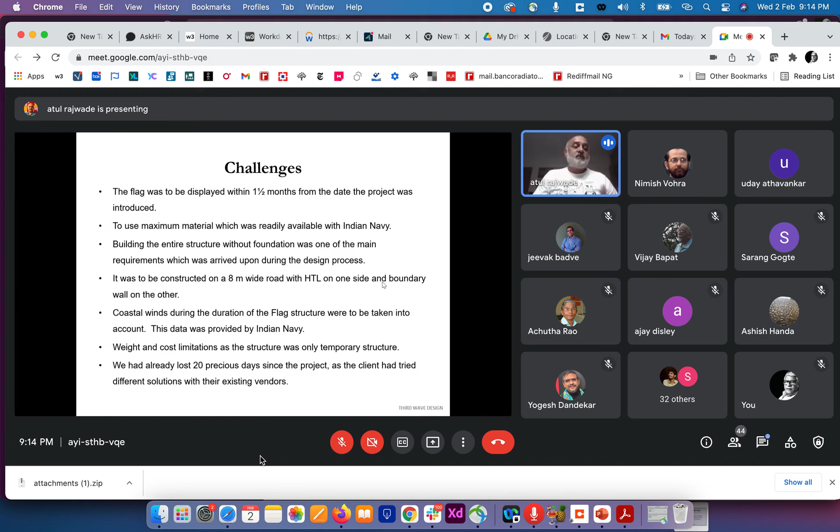Also, the weight and cost limitations of this structure were there, as it was only a temporary structure. And the last challenge was we had lost 20 precious days in designing. So with all these kind of handicaps, we started designing this particular structure. And then we arrived at a solution in a step manner.

Here also the Indian Navy officials helped us quite a lot by boosting our morale that, okay, we will give you a 200-ton crane, 200-ton lifting capacity crane with 65 tons of boom length, 80 meters of boom length. So you can have a lot of weight carrying capacity and everything. So slowly, with small steps, we were able to inch forward. And mind you, all this solution we achieved in less than 20 days. And then there were certain twists, which I will tell you later as we progress.

So the design solution was improvised as per the site conditions, equipment constraints, and the climatic constraints. Why climatic constraints? That also I will tell you, what happened later on. So we started this project on 18th November, and in 3 days we were able to give the first basic analysis, which Indian Navy flatly refused. And this was the first solution we thought of: we try to keep the fabrication as straight as possible. And I said that if I give a little bit of deflection to the system, then probably we can deflect the wind a little bit, and then our force calculations were reduced. But still, this kind of tonnage was quite a lot.

And then we decided that on this 8 meters road, we would extend it 5 meters beyond the boundary line of Indian Navy and break certain walls. That is what I had envisaged. And then I made this triangle with, can you see the cursor? So on this face, we decided to put a 51 meters, 50 meters flag.

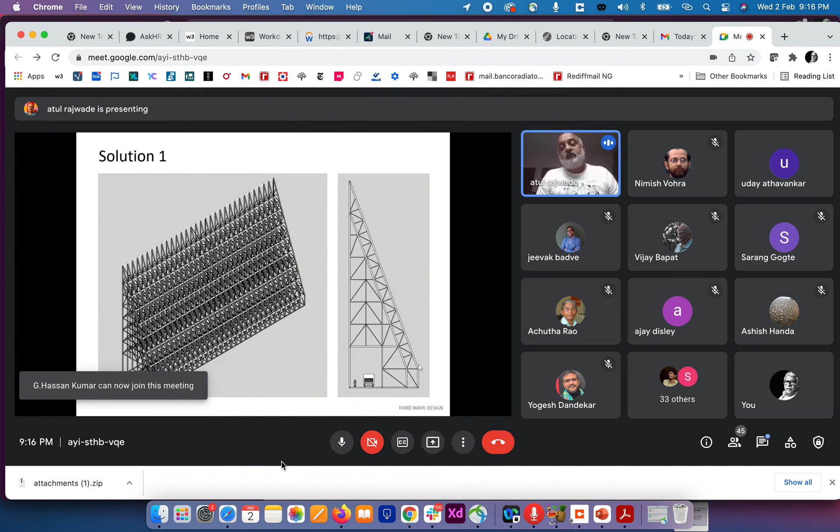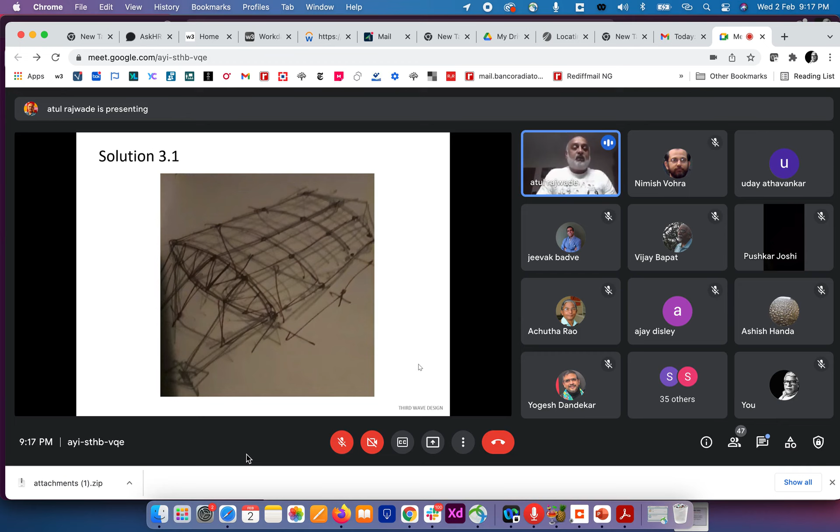And at that time, luckily, the contractor who had decided to plunge into this challenge was also with me. And I asked Mr. Kulkarni, can you and will you be able to give tensioning? Because generally I've done tension structures, but I've never done a tension structure spanning such a big length. So he gave me sufficient confidence: wherever you say, I will be able to give tension. You just don't worry. You just go ahead and design. So finally, with this kind of confidence from the contractor, I came up with this solution.

So in this solution, there were these 4 units placed at 23 meters center to center, and there was one top tray and one bottom tray. These trays had a very specific function: the flag will be unrolled with the help of the big crane, which will keep this flag at 25 meters height, and then there will be these sea cadets placed at 3 meters center to center. 22 cadets will slowly lower the flag. So this was our fallacy, or this is what we had imagined how the whole thing would happen.

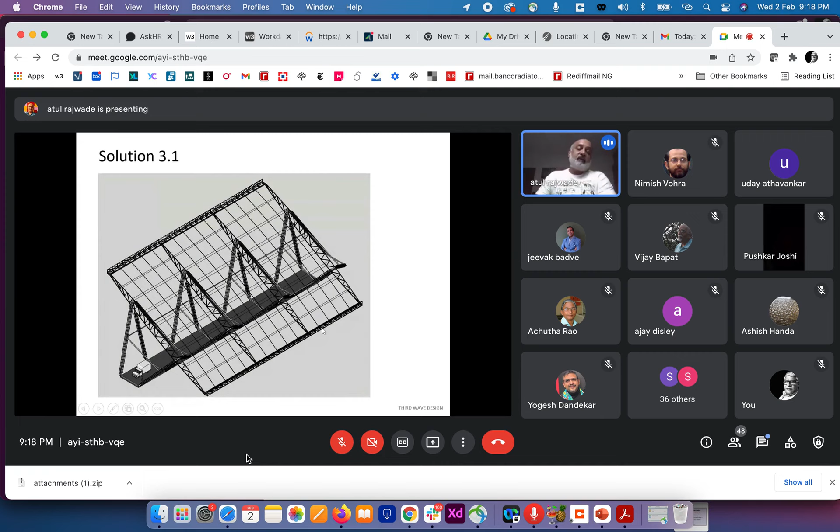And similarly, there is another tray below, just above the flood line, where another 20 cadets will stand and secure the flag below. So this is how we had envisaged the whole thing. So this is the 8 meters road. From the 8 meters road, we flared up the structure. This was a boat-shaped truss, made from the structural material given by Indian Navy. If I had to design it, I would have gone for a square hollow section, but we went for a back-to-back angle section, which was available. So we flared the structure, we supported it at one-third distances, and this is how we were able to do it.

And then I also convinced the Indian Navy people: don't tell me to put this flag at 51 meters straight, rather we can put it at an angle of 30 degrees. This will reduce the weight and the force of the wind, and it was also visible from Gateway of India.

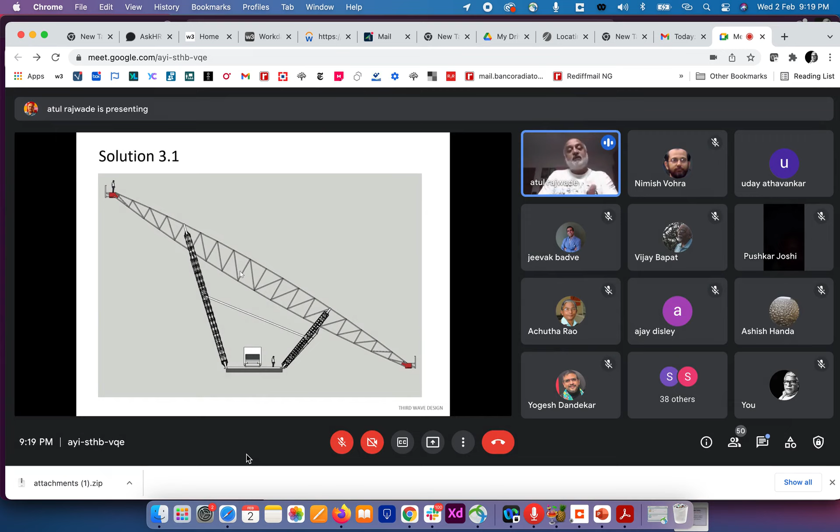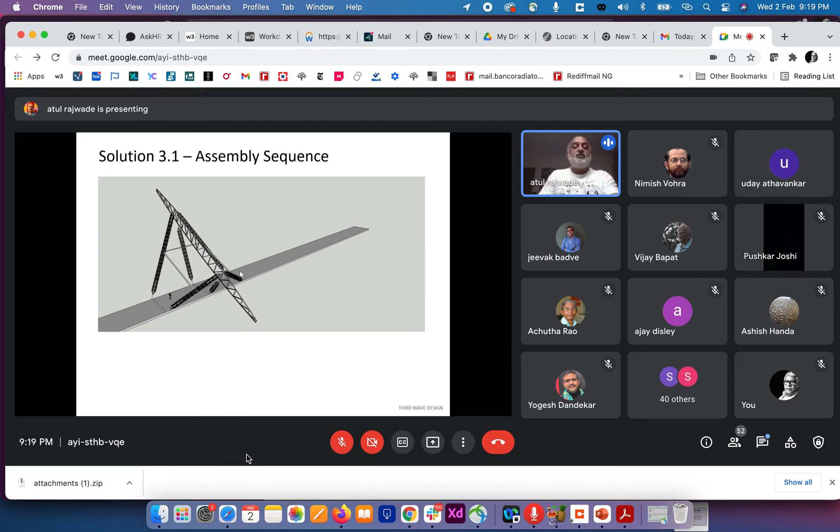So we actually carried out all the visual simulation tests. Anyway, I will just go through the assembly sequence we had envisaged earlier. So this is how the supports will be assembled. Then this one unit was secured. Then the second unit will be secured. The top truss will be put in place.

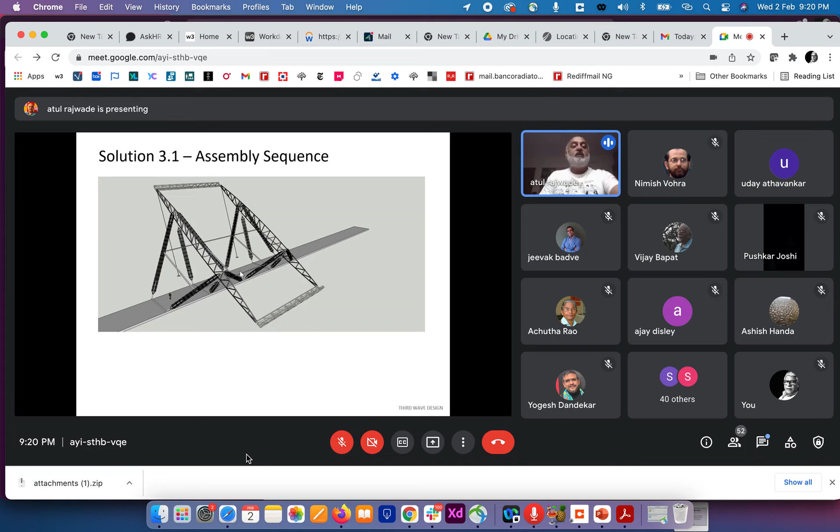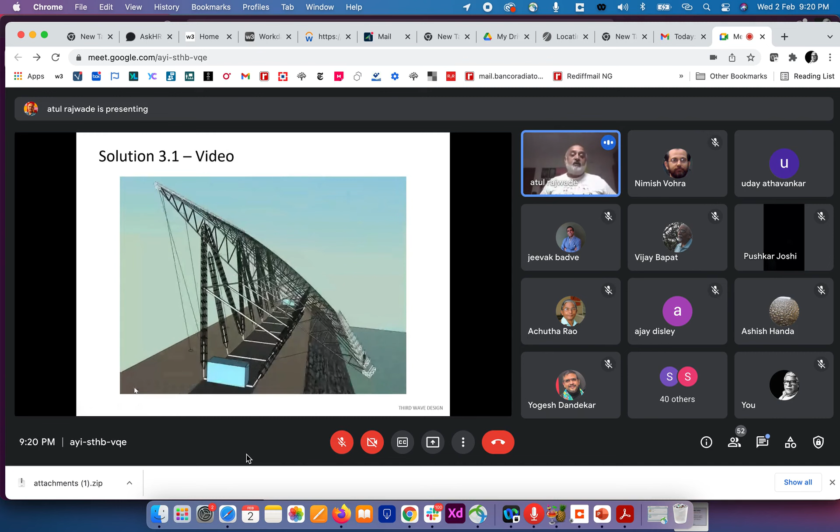The tray will be put in place. Then it will be secured with cable ropes behind to balance out the weight. And this is how the whole assembly sequence will actually happen. So this is what we have thought, and this is a small video of the structural system we had envisaged. And why I'm saying that we had envisaged, there is a twist to the whole thing.

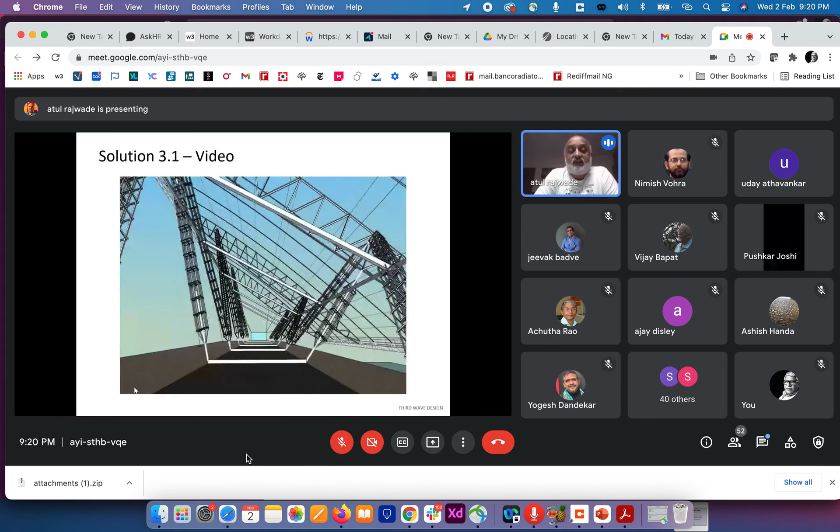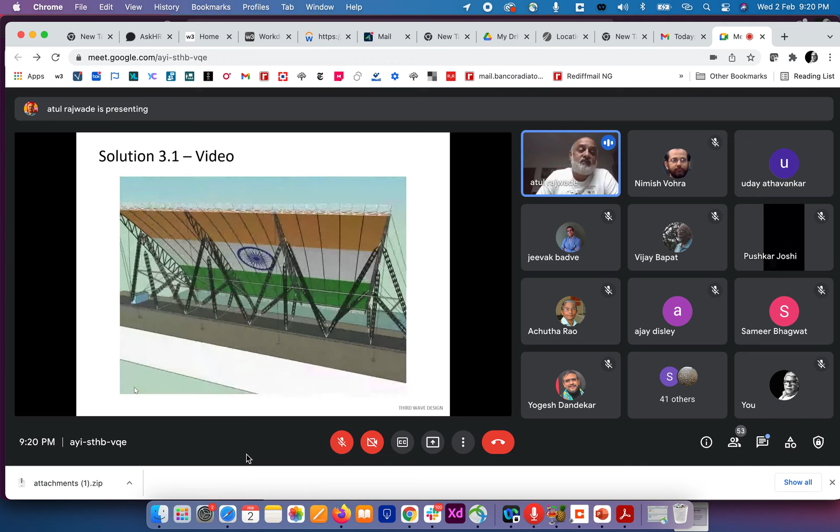When we started working on this activity, mind you, this is just an 8 meters wide strip. We are used to working in workshops where we make these pre-engineered building sections, and here, in order to save time, we said that we move the workshop to the site itself, and it was hardly a small strip. So this was the solution.

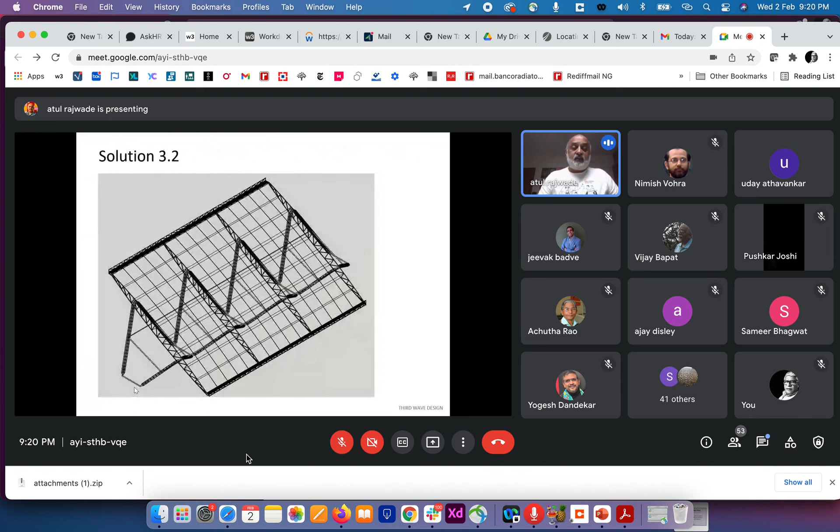But then what happened was, somewhere down the line, looking at the speed of construction and everything, and this happened on 20th November, by the way, we realized that the contractor was going at a little slow pace and it would have been difficult. It was possible, but it would have been a very tense situation.

So we decided to go for this really daring solution where we would support the whole structure only on 2 supports, which was spanned with the help of cables. We decided to make a cable-led structure, and we spanned the whole truss, the whole flag, only on these 2 supports at the ends, supported by 18 mm cables. Again, Indian Navy was kind enough to give these cables.

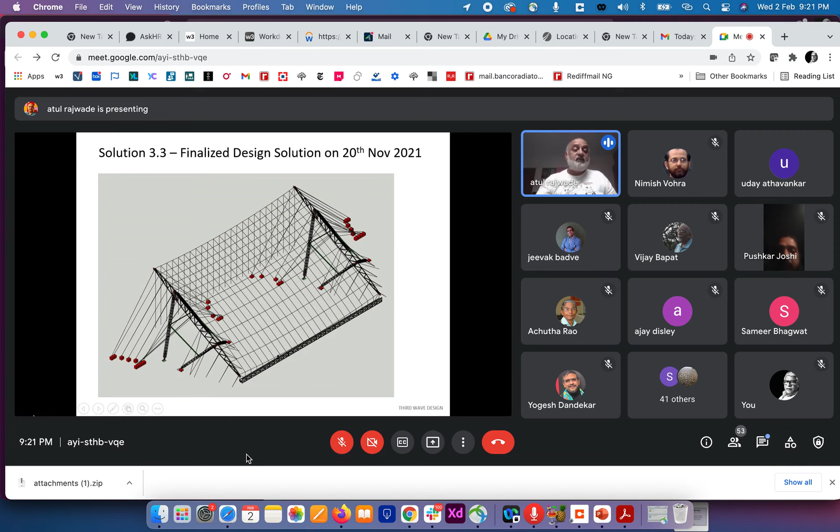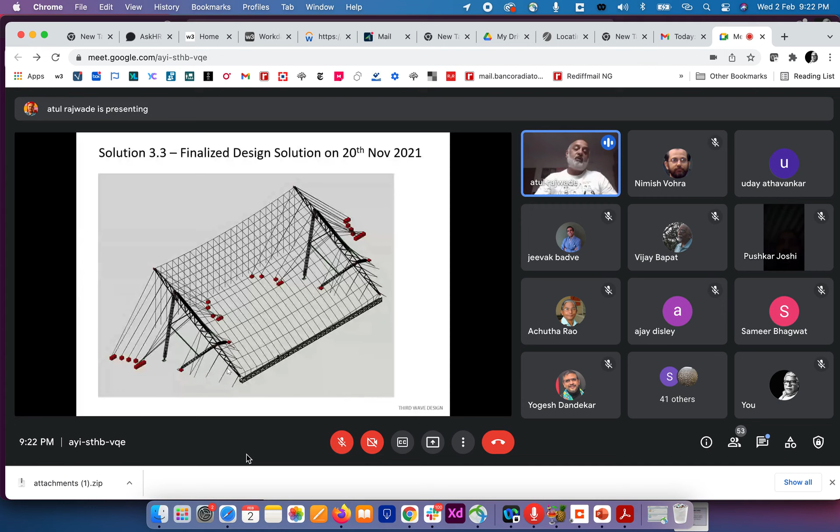Now the whole point was that these cables were tied down with the help of counterweights, and you can see these counterweights here. These were all 3.5 ton to 5 ton counterweights, with which the whole structural system was stabilized. And on the reverse, on the sea side, we put all the rock anchors on the wave breakers which were there. So this is how the final scheme was decided.

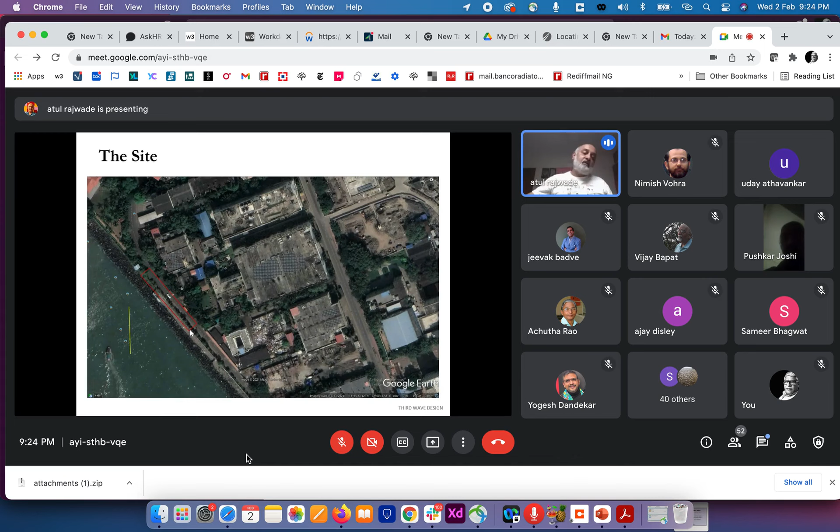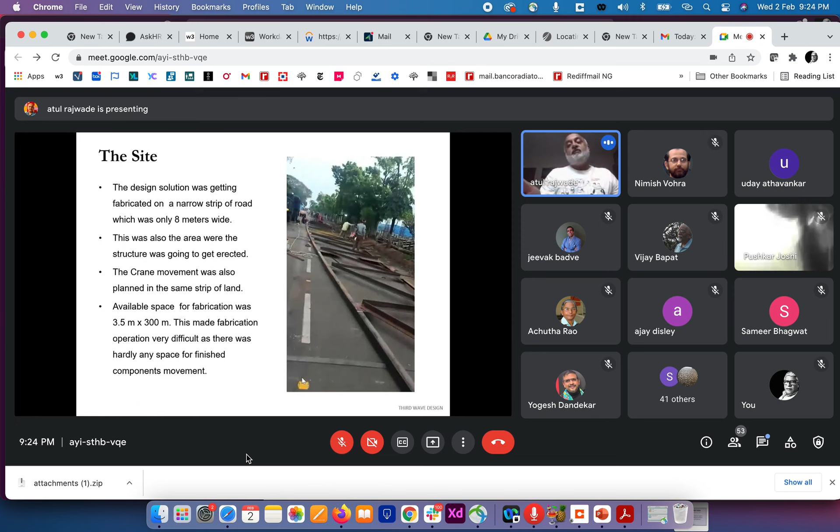Now the site, as I told you, was just an 8 meters narrow strip, and I will just show you a small clipping of what kind of problems we faced. The available strip for working was only 3.5 meters by 300 meters, and this was really tough for the contractors to actually work on such a small restricted site with 3.5 meters clear for the crane movement.

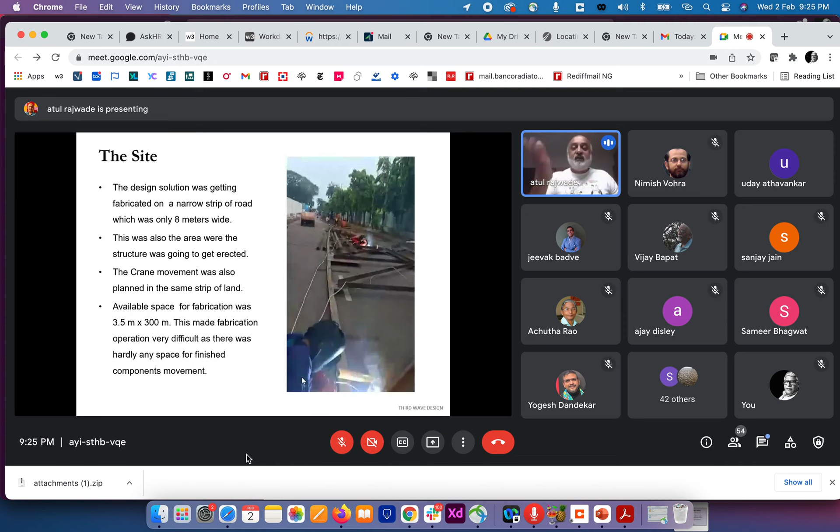And you see, this is a 50 meters truss. When we do all these things on computer, okay, we know it is 50 meters, but when we actually start seeing it at such a scale, it's really scary. So this is how, using the same material we had, we developed this thing. We put 50 workers, and we were really pushing them to the limits. So this is just one truss getting over.

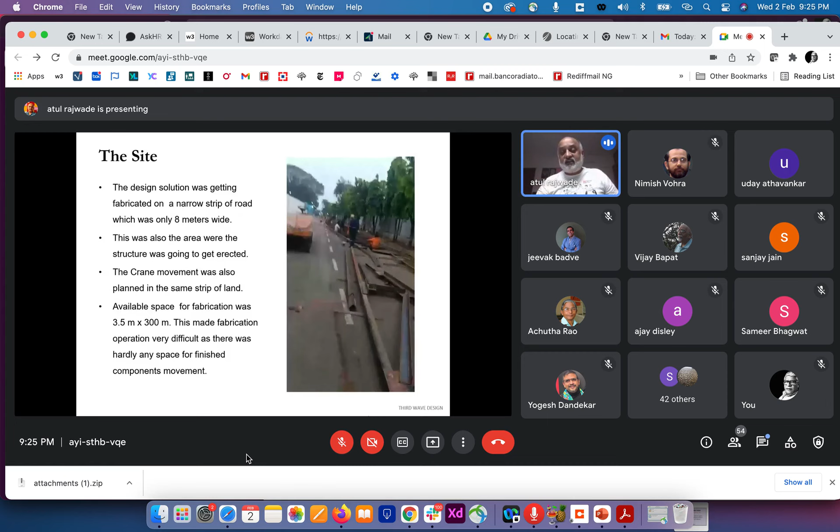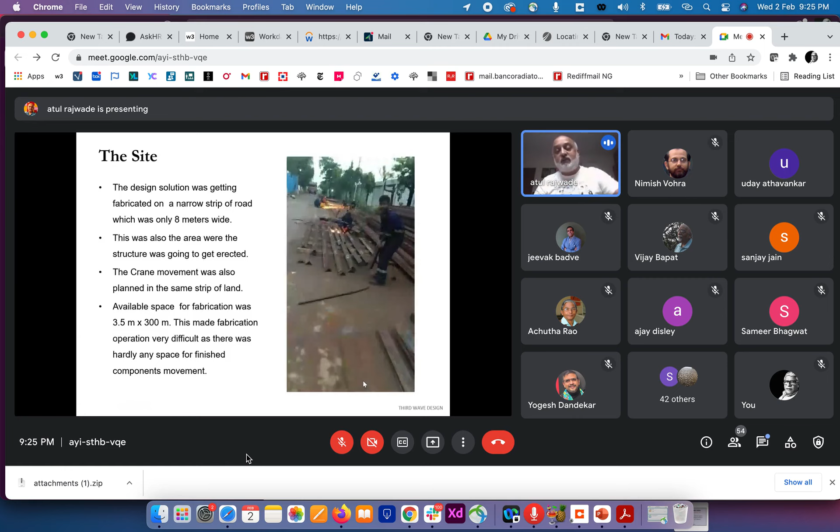The second truss, then I will just forward the video a little bit ahead. Once this is done, these 2 trusses were getting manufactured. Then there was this cutting line where people were preparing all the material. This was the cutting shop which we had put. So all the plates were getting manufactured in this area, plates and everything. So this is how our workshop was.

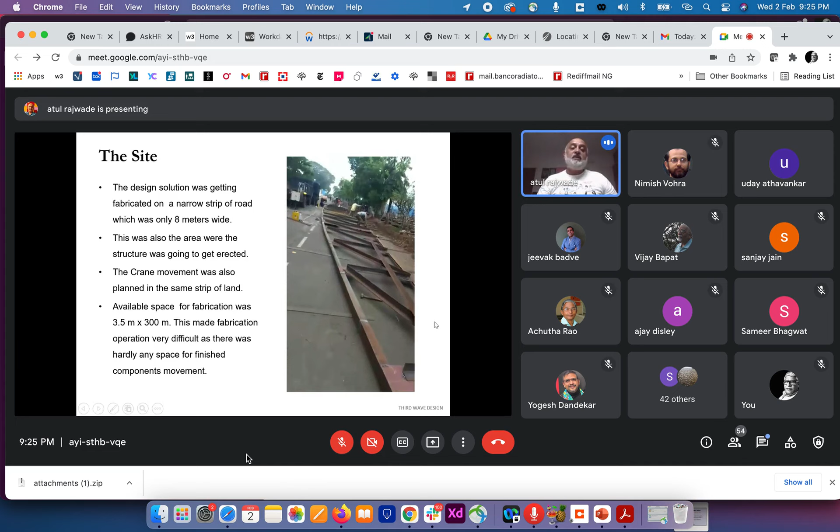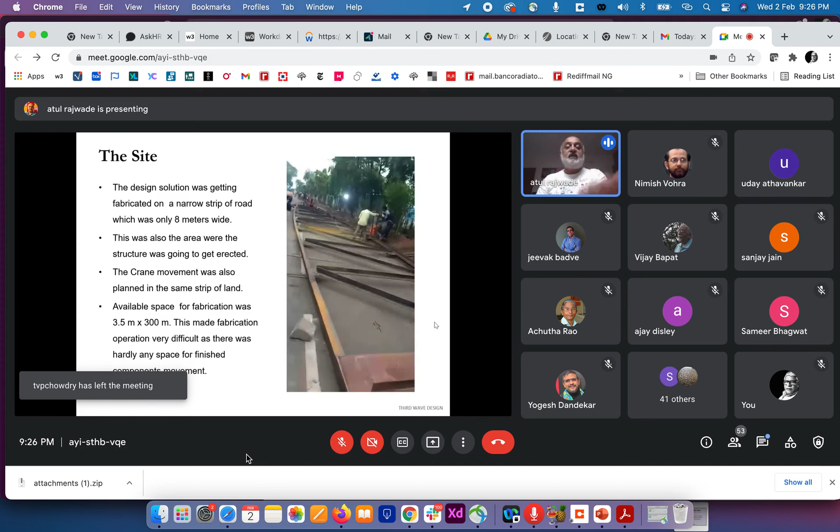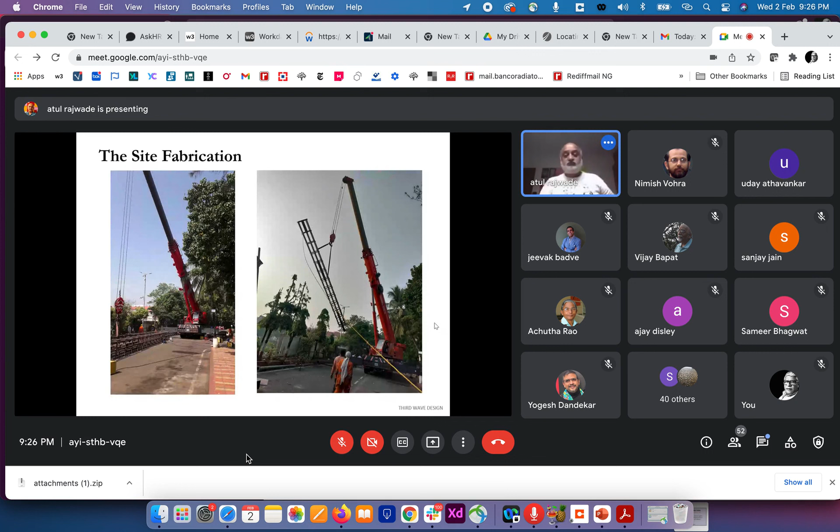Normally, our workshops are places where there is an EOT, electric overhead traveling crane. But here we had no luxury of putting an EOT. We had to do all this lifting with just cranes around. So we started with our conventional puja on site, and then this is how you see the work in progress. These are the photographs of work in progress, and then these big mammoths came into picture. So this is that 200 tons crane which simply lifts it, and it's how the members were prepared, and they were put in place.

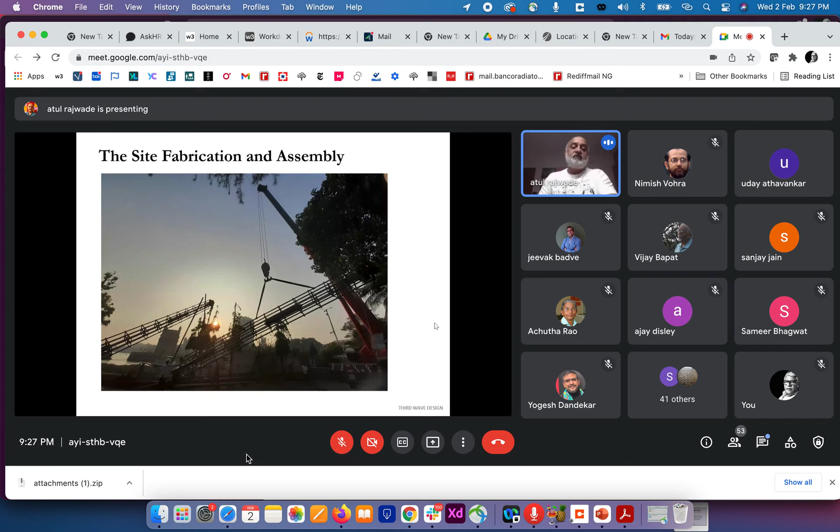The work was going on 24 hours. Many a times we actually slept at 3 o'clock in the morning. We used to go to the hotel behind the Taj and then again come back at 9 o'clock. So this was the kind of work which was happening continuously, and there were many challenges. The metallurgy of the material which they had provided was not actually the one which we had thought about. There was a certain amount of brittleness in the steel, so we had to do some design changes. This is how the whole thing was put in place.

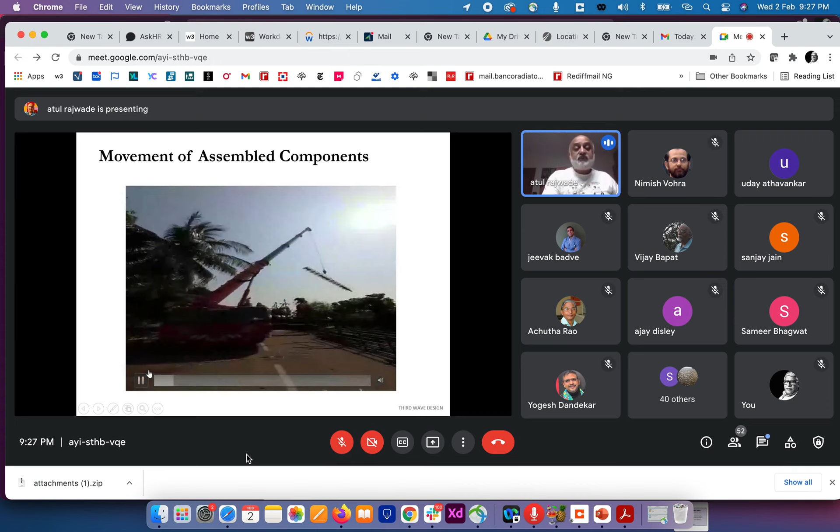Then I will just show how, if you see this crane, it was occupying more than half the area of the road, and it had to have all these things cleared out. So it used to eat into our fabrication area also. And then this is how the members were lifted and put in place. I'm just going a little fast because we have got very less time. This is how the cranes were put in place. There was another crane which was holding.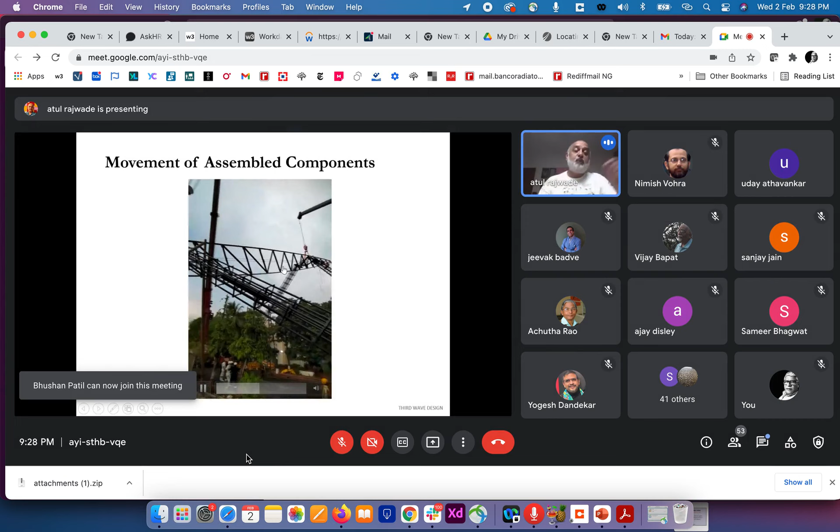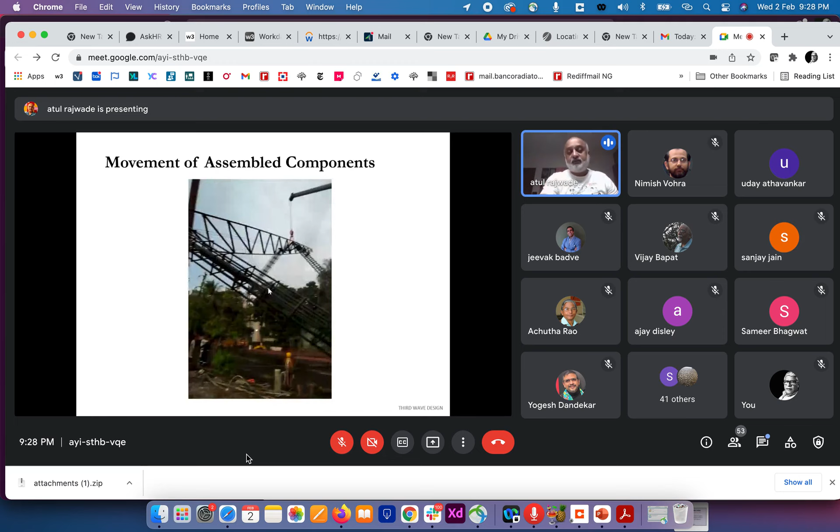Then you see the small dots. These are the people, our fabricators, brave people. They used to climb all these things. They used to bolt it with 10 mm 30 dia bolts. See this particular member. It was hanging freely before it was secured to rock anchors behind. And then because of the speed, you see the crane and how the trusses were put in place. This is how the two cranes lifted this 50 meters truss, and it was like an orchestrated move, a dance of these two booms, which slowly placed this 50 meters truss in position.

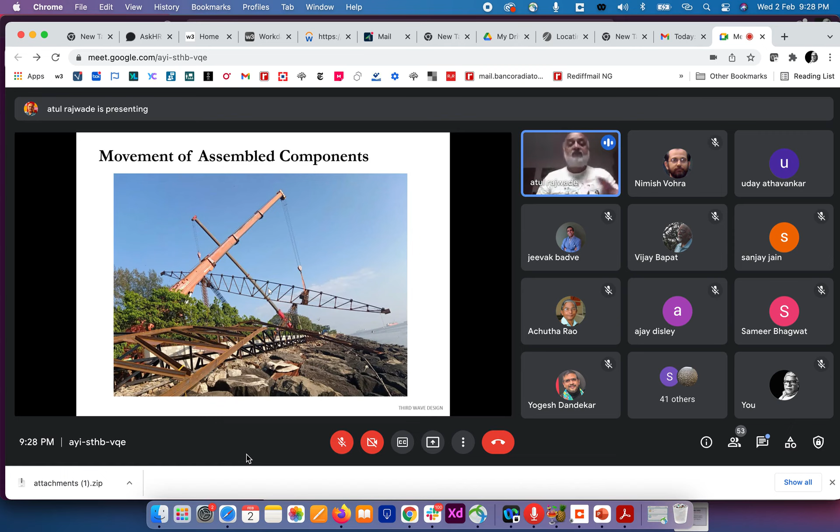Right now in the picture you can see that this looks like a very stable system, but I will just show you another video where you will see how this truss, when we tried to lift it, was moving like a snake, and it was scary. It was in our modeling; we knew that this is going to deflect 1.5 meters, but when we actually started lifting this thing, we realized, oh my god, are our calculations right? The view made us doubt ourselves. I will just show you, and it was really scary.

So lifting a 50 meters truss, which was absolutely coming to life. There I had to put a brave face. Oh, I do it every day. But this was not the case. This is the first time I'm seeing a 50 meters planar truss moving. Even the naval officers, every one of us was really tense at that time.

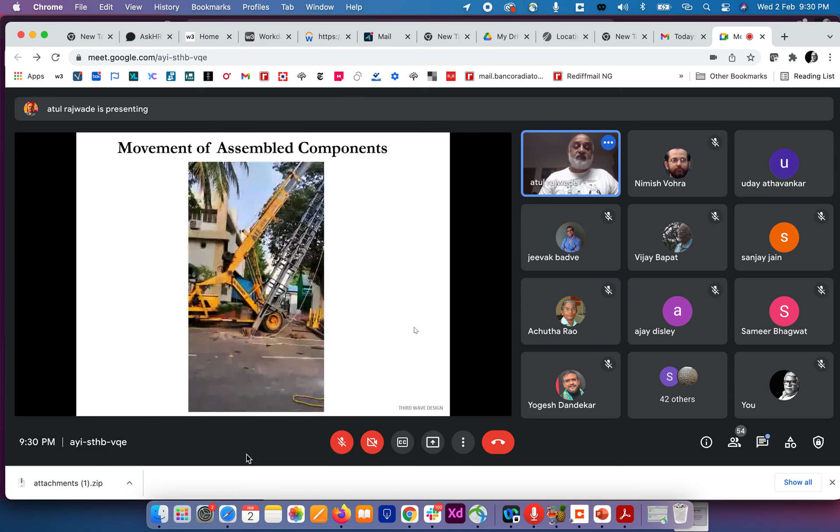Anyway, so again, how people went climbing onto this particular truss to secure the angle of the truss. And mind you, this particular structure was simply placed on the road with a couple of bolts.

There was no foundation; simply the road was the foundation. This is how the truss was looking after we assembled the first truss, and how the system looked. This was a big relief to us, as our calculations, theory and practice were in one line. This is how the structure started looking after that.

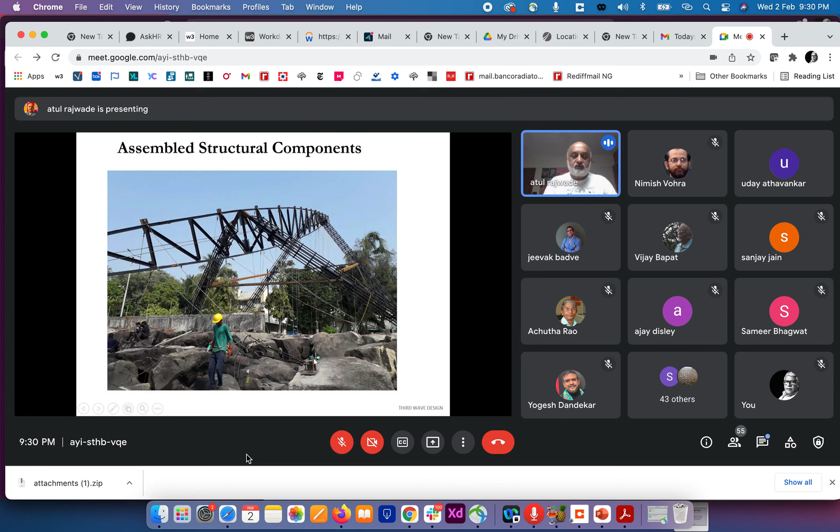We had attached lots of cables, and these cables were attached to the rock anchors with the help of grouts. This is how the structure was aligned, so that this particular portion was just above one meter above the high tide line.

After that, as I told you, we decided to span it with 18 mm cables, and below the 18 mm cables we decided to go for this backing cloth. This backing cloth will actually give a smooth sliding surface for the flag to roll onto this angular plane.

So we put all this backing tarpaulin for the flag structure, and then this unseasonal deluge and the second clause came into the picture. The wind had already reached 15 knots, and I was scared, frankly, and I have no inhibitions about saying so. But I was indemnified because of the second clause which was put in place. That night, the wind went up to 24 knots, which was measured. So it was like live testing for my structure.

In computer simulation and in reality, it behaved even better than the computer simulation we had carried out. This was during an unseasonal deluge, rains which flooded Mumbai, and that too in November. November rain - my goodness, that was horrible.

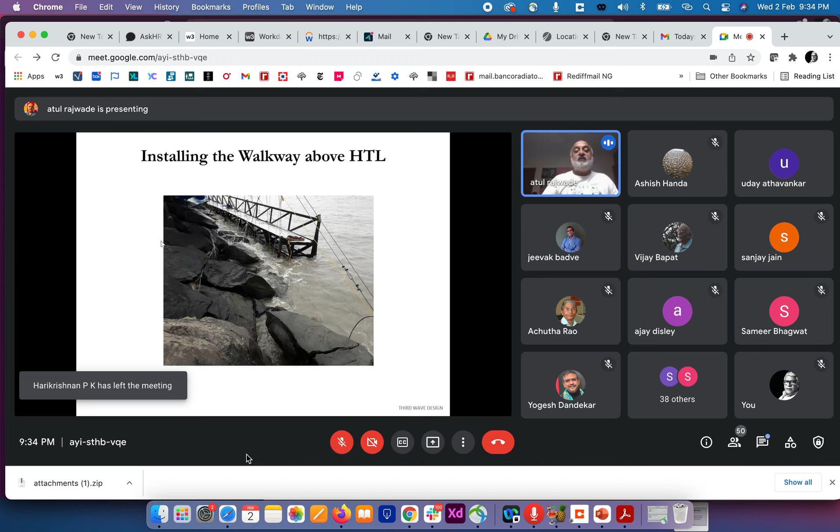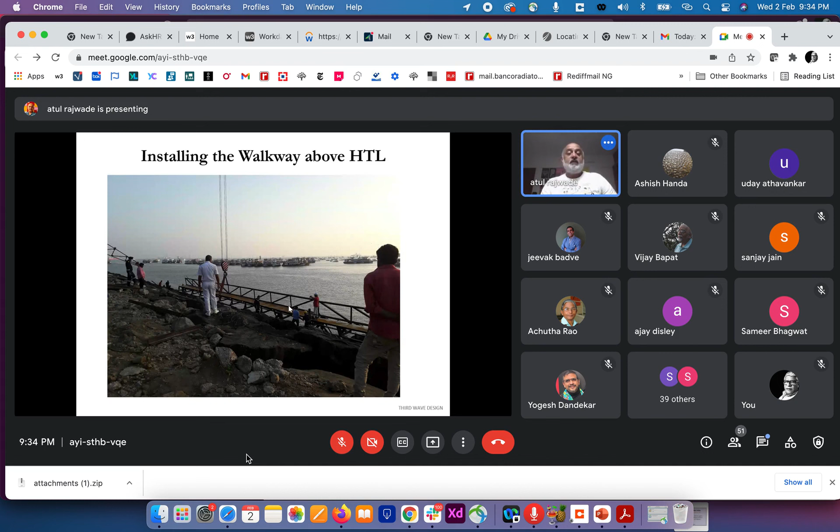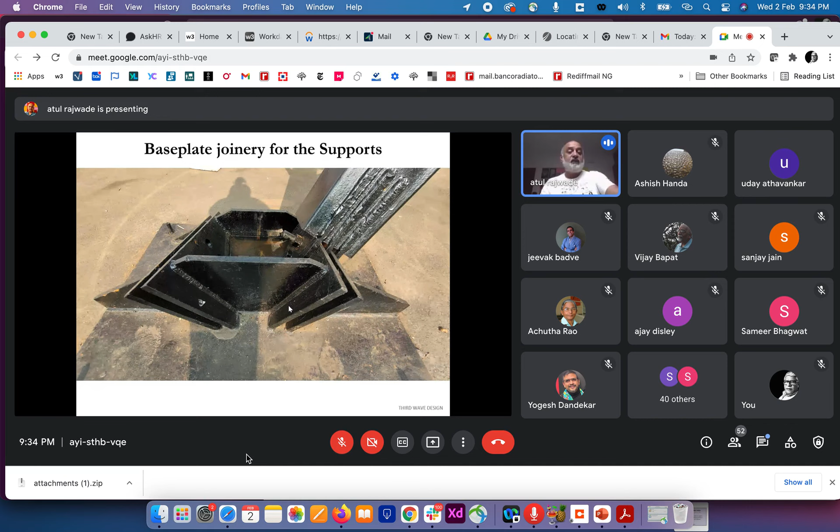In the meantime, we fixed these walkways below, on the wave breakers. This is the joint base plate joinery of the support. We just slided this whole structure - normally we would have gone for profile cutting, but instead we actually cut it by hand and put it in place. This is how the structure looked when it was supporting the flag.

Now, instead of backing cloth, we decided to go for a fishing net, because Koliwada is close by, Bapat sir, and nylon - so we decided to go for nylon, which is a strong surface. Instead of the backing cloth, we used this nylon net as the backing cloth. This is how the whole thing was looking.

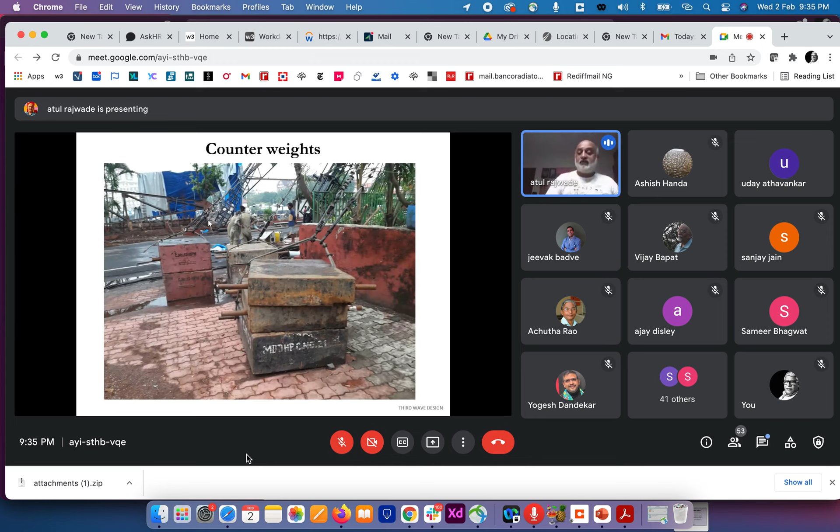These are the counterweights. In Bombay Dockyard, they carry out ship tilting exercises, so they use these counterweights. For that span, we brought in all the counterweights that were available - 195 tons of counterweights were procured from the Bombay Dockyard. When we fell short of counterweights, I told them to get anything heavy, so they used to get anything heavy, and then we would do quick calculations - okay, this is 14 tons.

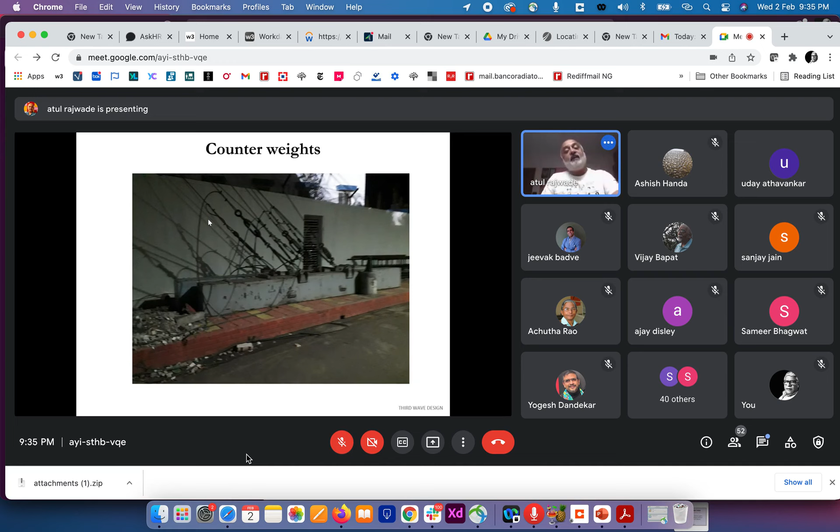Then we developed systems for actually anchoring that weight. Finally, when everything was really done, we even got ship anchors - okay, this one is 2,800 kilos, put it there, this is a good counterweight. Now this is the flag. This flag is looking like an anaconda.

And it was twisted. So the Indian Navy cadets were brought in, and in a combined group they carried the flag. This is the flag kept in one of the control panel rooms. And then this whole structure was secured.

The backing net was put in place, and it was really tough. My fabricators—you see this person sitting calmly at a height of around 15 meters—were put in place to secure the flag when it was lifted into place.

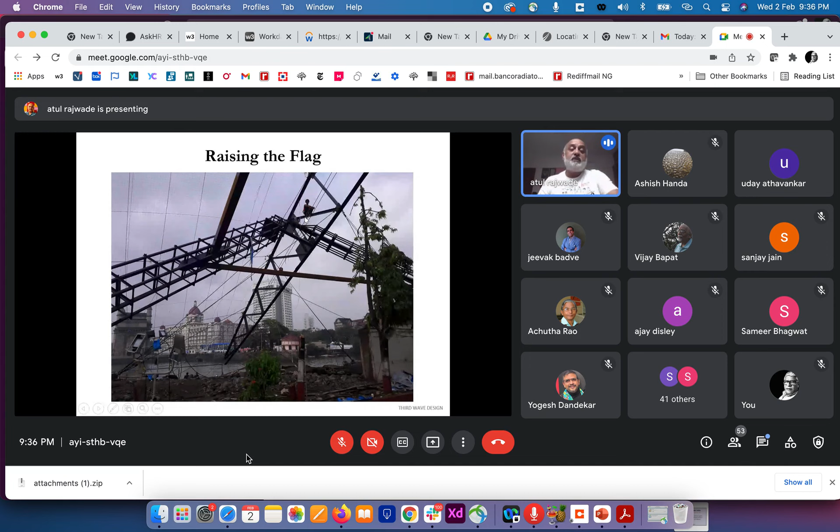Also see this person at a height of 25 meters, with ropes attached to him. These ropes were attached to him, and he was able to put them through the pulley at the top, and then we physically lifted the flag. So you see the cadets out here; they tied the flag to the ropes we had put across.

And this is how the flag was lifted. This was the left hand side team, and this was the team placed on the roof behind. Slowly but steadily they started lifting the flag.

The commodore used to give a halt, so the flag was lifted from the sides, then the two sides were told to stop. Then it was pulled from the center, then told to stop again. This was all happening with a coordinated effort on the Motorola walkie-talkies. So slowly the flag was lifting and getting into position.

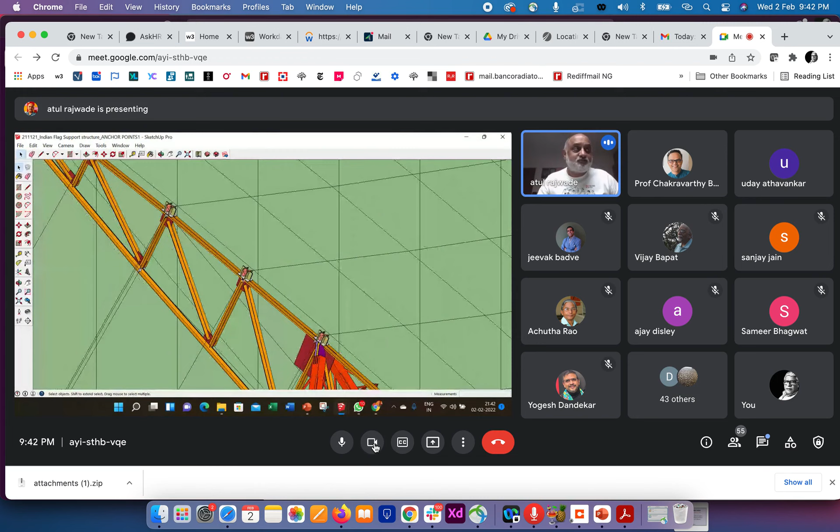Yeah, yeah, I just want to show you the model. Just show.

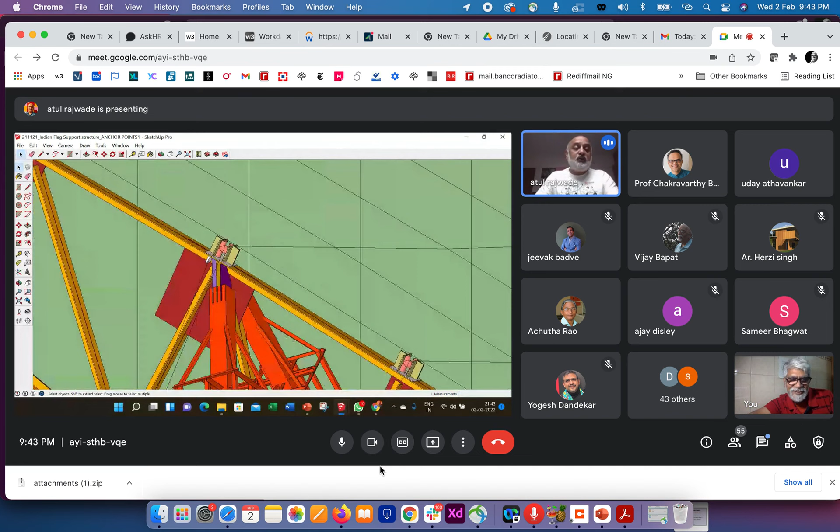We saved around 3 lakh rupees by developing this kind of sliding mechanism, because we could replace it with what we had without needing to procure new equipment.

What's the total project cost, Atul? It was around 1.75 crores, and the flag was around 25 lakhs.

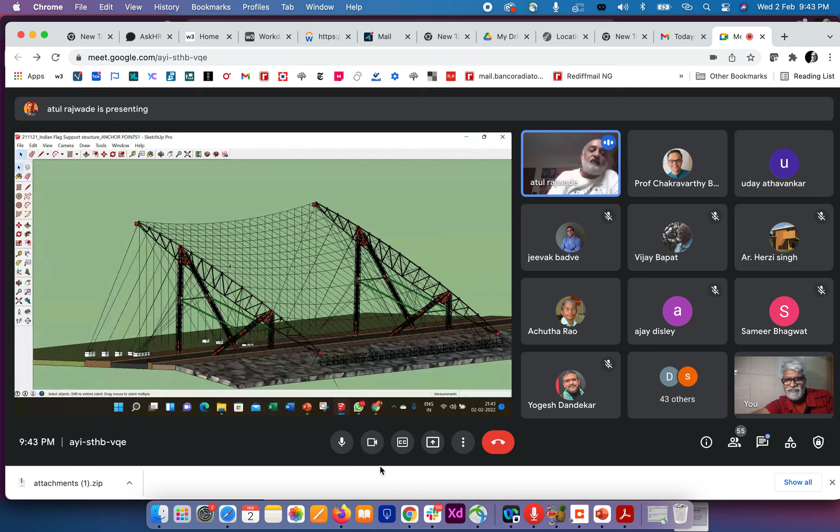Which material have you used for this flag? It's a simple Khadi flag, from the Khadi Gram Udyog. That was not my scope of design, it was designed and given to us.

Nice, good presentation, Atul. Before we start the questions, I think you deserve a big round of applause. Thank you, simply amazing. I'm sure, beyond anything, it would have made you feel so proud. We see Bapat smiling, Atul.

You're also proud, no? Now I am smiling, but I was scared. I was scared. After the rains, it was crazy.

Okay, let me open the forum for questions. Whoever wants to start off. I suppose I have finished, I finished it in time. The presentation finished in time, right? Very much on time, I was actually, yes sir.

Yes, Athavankar sir, please go ahead. I have no questions, you cannot question such a project, except that I do want to compliment you for taking such a daring job, and in such a short time. It is really adventurous to take such a project. So I do compliment you for all the kind of work that you've done. Wonderful job. Thank you, sir.